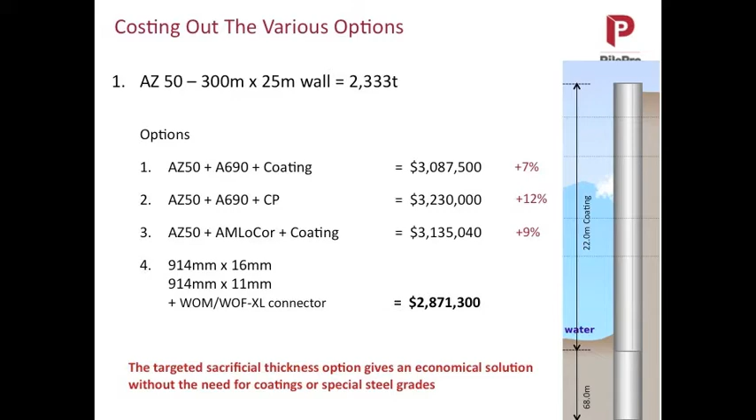The best way to get a durable structure. Now, occasionally, I will talk in the US to Department of Transportation officials. In the US, they're very keen on doing accelerated bridge construction, because I don't know if you heard, bridges in the US are in a real bad state of repair. So they're very interested in fast forms of building a bridge.

So we propose sheet pile in the abutment because it's the fastest and lowest cost way of constructing a bridge, believe it or not. It replaces all the concrete. And they invariably will say to us, look, we would never go with steel because steel has a maintenance cost, concrete doesn't, and we can't budget for that cost. So my answer is, well, look, how wonderful it is to be able to know at any point in your structure's life how much life you have actually got left. And you can do that with steel.

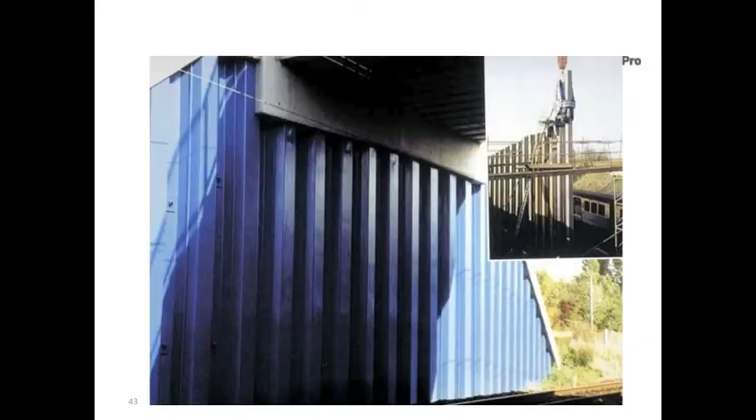We have looked at replacing circular columns precast with a steel tube. And what jumped out at us was the fact that there is less steel in the steel pipe than there is in the rebar in the concrete in this. And as the design codes have become more rigorous for seismic conditions, the amount of rebar in these columns has just increased. It's so dense that it's very hard to get the rebar into the formwork to pour the concrete.

And they've had to reduce the aggregate size that goes into the concrete mix so that they can get the concrete to pour itself around the steel rebar. It's that bad. In effect, what you have is the reinforcement is carrying the loads of the structure. The concrete is simply the cement paste that's holding it all together. It's kind of what you got.

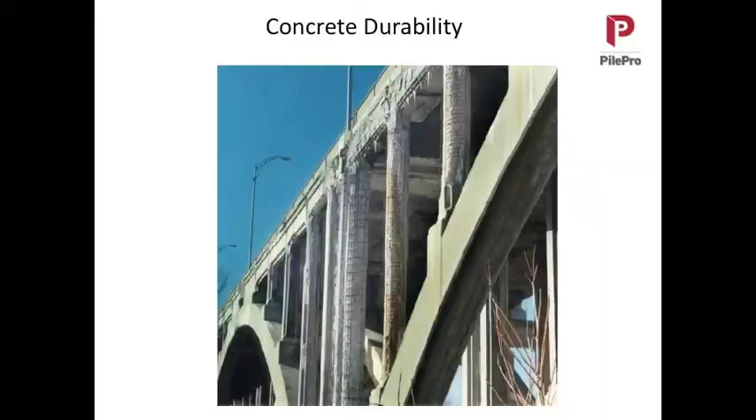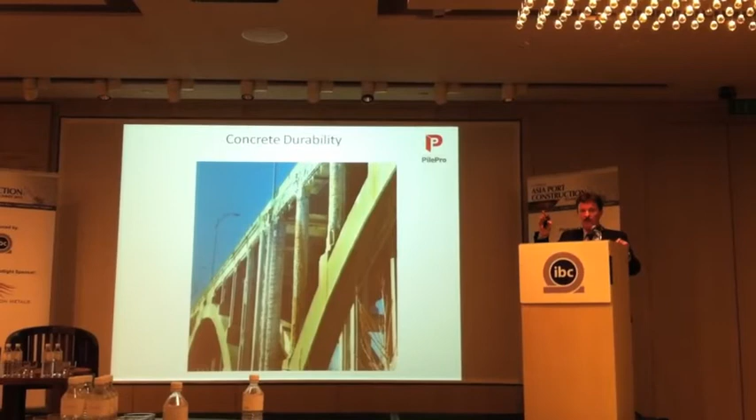Once the rebar is included, embedded in that concrete, it can no longer be inspected, it can no longer be maintained. It's in there. Once the corrosion process has begun, that we looked at just a few seconds ago, once that's begun, it's trapped in there by the cement paste as it wraps itself around the steel, continuously, can't avoid it.

And when the concrete inspector comes along to the site and looks at the project, and he taps the concrete, and he ticks it off, and he says, it's okay, it's fine. He hasn't got the foggiest idea what's going on inside that concrete structure. And he will tick it off as if there is no problem at all. You can't see it. It's not that concrete doesn't corrode, it does. It's just that you can't maintain it, so you don't. And that's the big issue.

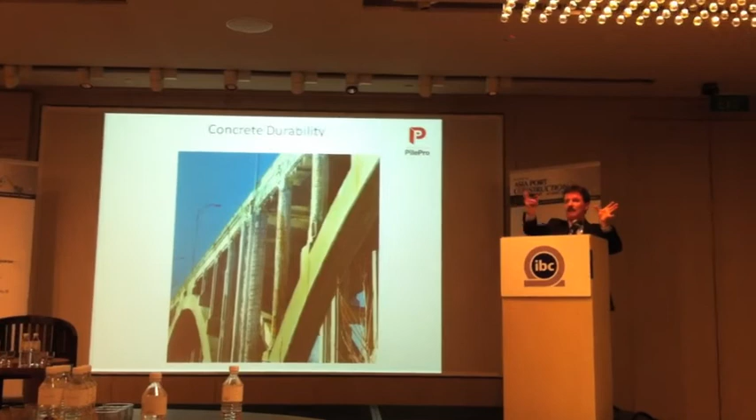How do you monitor the degree of carbonation that is going on inside a concrete structure? You can't. So you don't, and you ignore it. And you ignore it right until you get to this state, failure. So don't tell me that steel has a maintenance cost and concrete doesn't. Concrete does have a maintenance cost, it's just no one knows how to do it, so it's ignored. So design the steel to have the design life that you want. Allow it to corrode all the way through because you have that sacrificial thickness. And then you have an equivalent solution.

And then I came across this. It was produced by the Port of Long Beach. It's wharf design criteria, and it's a fantastic document. For anybody who is designing port structures, for all those engineers out there, they really take this to heart. It's beautifully laid out, right up until you get to chapter 5 on piling. The standard pile is a 24-inch octagonal precast pre-stressed concrete pile.

The use of steel piles is strongly discouraged due to the corrosion potential and the associated higher maintenance cost. Well, what maintenance cost is that we're talking about? Is it a maintenance cost that you're unable to get into and understand? Additionally, corrosion barrier coating systems and encasements impede routine visual pile inspections. Steel piles should only be used when project criteria and site circumstances dictate.

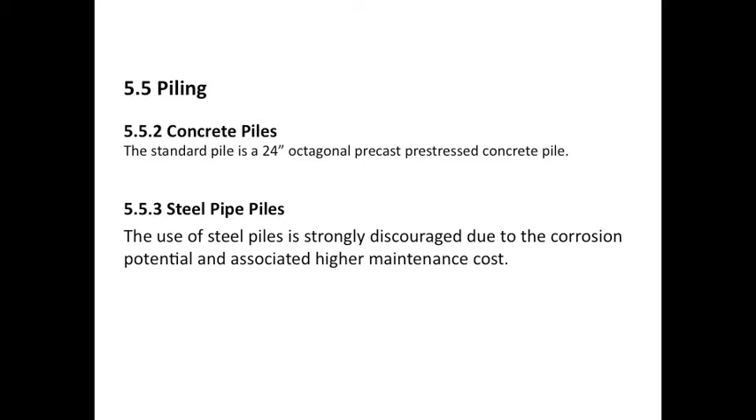Corrosion barrier coating systems and encasements impede routine visual pile inspection. Excuse me? But isn't that exactly what concrete is doing? Isn't concrete just doing exactly that? So here's the way I rewrite this paragraph. Beg your pardon, too fast.

The use of steel piles is encouraged as the corrosion potential and maintenance cost are identical to concrete. Additional corrosion barrier coating systems and encasements can be used to extend design life. Steel piles should be considered along with concrete on every project.

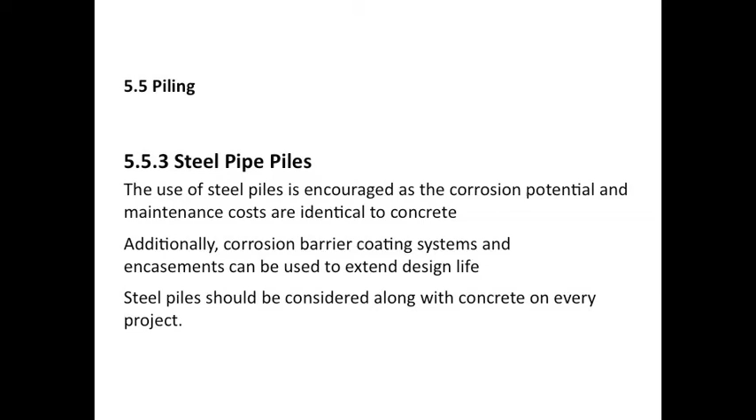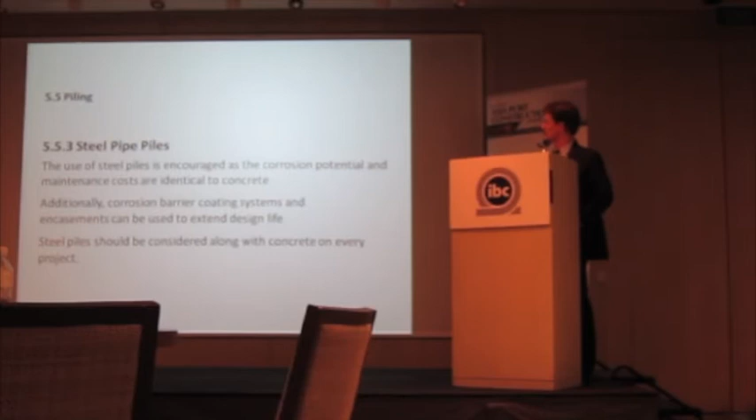Now, I'm a steel guy, and I would say all this, so please forgive me if I offend anybody with my logic on this. It brings us right back. If we've got a steel solution and steel is okay because we feel it's valuable, then the use of the O-pile system in this kind of configuration, for the new breed of high-capacity cranes in the modern port structures, is probably the most efficient solution that you can get. Thank you very much.

Thank you, Gerry. Very good. Gerry or Gerry? Gerry. Oh, sorry. Yeah. A question to the floor. Are there any cement manufacturers here? Okay, we've been brainwashed. Steel is brilliant, right? Yeah. So, question. We have a question over here. Of course, not from the cement manufacturer.

But Gerry, have you done any life cycle comparison with concrete piling and steel piling? Life cycle comparison? Also, another issue is, most of the time with a concrete structure, when a big ship comes and hits, you have partial damage. So as per the code, they can replace the damaged part. But with your system, steel, what do you have? Can it be done? Yeah, sure. Let me take the last one first.

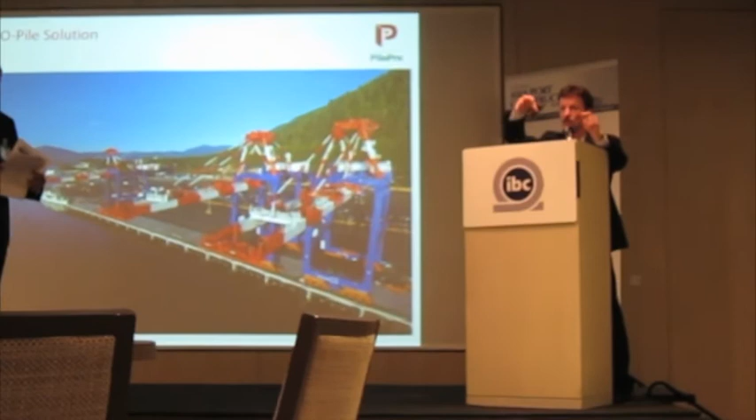So on a collision by a vessel, it depends on the location of the damage. If it's above the waterline, that's very easy to repair because you can extract the component of the pile and put in a new one. And it's very easy to put a little temporary limpet dam around the damaged area so you can have a dry excavation and do a little repair. The nice thing about steel is if it's just dented in or you have a hole, you can plate it up very easily. You can weld the plate and patch it up very quickly. You don't have to pour anything, you don't have to wait for it to set.

If it's below the waterline and it's a serious impact, then you have to look at it more seriously. You'd have to put a bigger cofferdam around the area and do a big excavation and pull the pile out. But because it's all component pieces, you can take out a component and put a new one in.

Okay. And on your first point on the life cycle costs, the way I approach steel is we design it for a lifespan. When you design concrete, you don't do that. You actually design it to be as dense as you can get it because you want it strong and you want to reduce the porosity as much as you can for the reasons I explained. But you don't define a life, you just hope it gets there. And you automatically think it's going to last much longer than steel.

And in fact, in many structures in the US, the reason they've got bridge problems is because the design lives are not being reached on the bridge designs. Concrete is breaking down before it gets to 75 years, and that's the issue. But with steel, you define the design life. You work to a 75-year design life, and you build it in by sacrificial thickness, by coating, by cathodic protection, by higher yield steel. So it's a different way of doing the same thing.